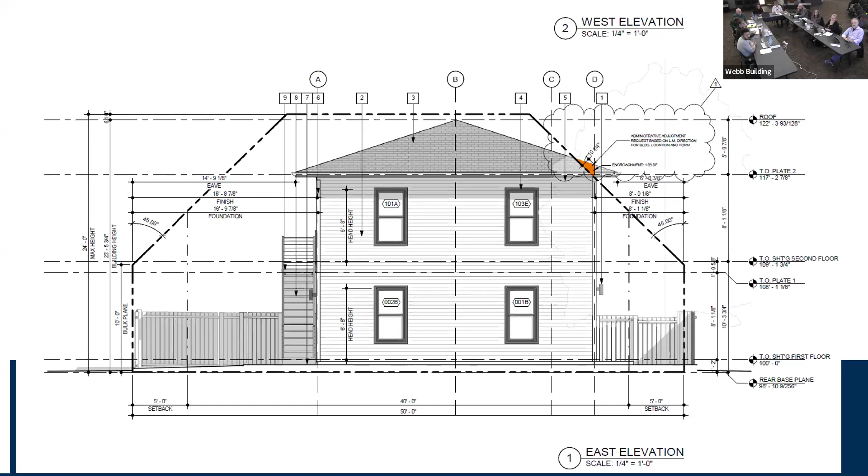So staff are supportive of that administrative adjustment request as the project has been placed on the lot to be closer to the north side of the property line, which is where it's creating that encroachment, to be placed totally behind the primary structure. As you can see here in the site plan, there is an exterior stair on the south side that does stick out a little bit, but the primary building massing is totally behind the primary structure.

So staff are recommending that the commission find this administrative adjustment appropriate, and per conversations with the city attorney's office and the zoning administration team, we have determined that this is the appropriate motion that the commission should be making on administrative adjustments. Therefore we have pulled this item off of consent just to clarify this motion and use this verbiage here.

Okay, commissioners, any questions for staff? Larry asked about when we use this language, whether it happens prior to the motion to approve the actual design. For any administrative adjustments we have in the future, we'll be using very similar language to what's on the screen. We will also clearly state for the future when you do not find the administrative adjustment appropriate, for clarification for zoning. So there will be some slight changes to the motions you see in the future when an applicant is requesting administrative adjustments.

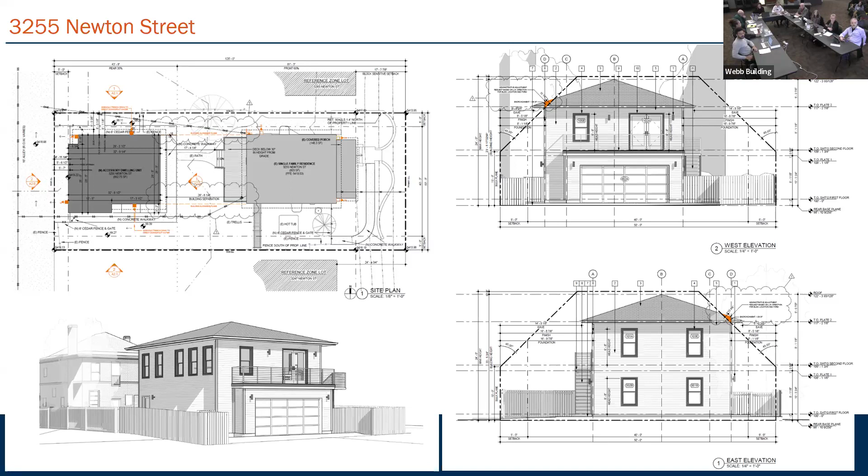Yeah, I think Brittany pretty much summed it up. It's just such a small part of the roof structure that's actually encroaching. Some people even think that's just the eave, but it's exactly where Landmark has asked for it to be, and we've gone through so many reviews, that's why we made that decision. It seems to be such a small encroachment that hopefully with you guys' help we can push forward.

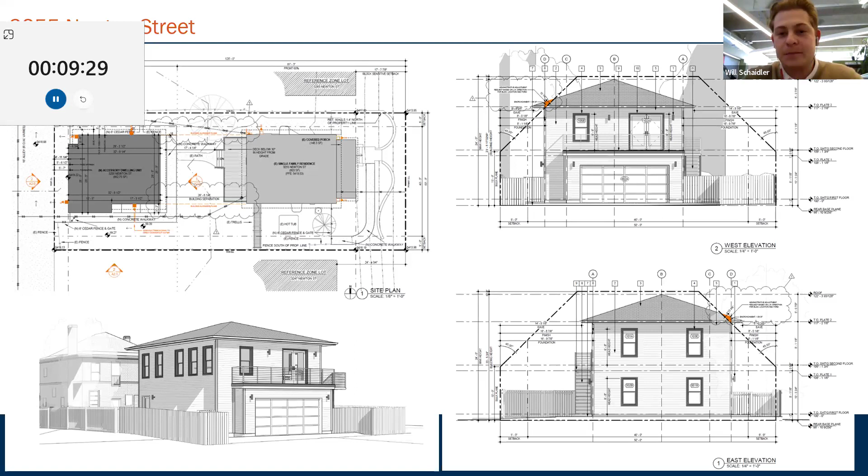Okay, well, thank you. Commissioners, do you have any questions for the applicant? Okay, well, there aren't any questions.

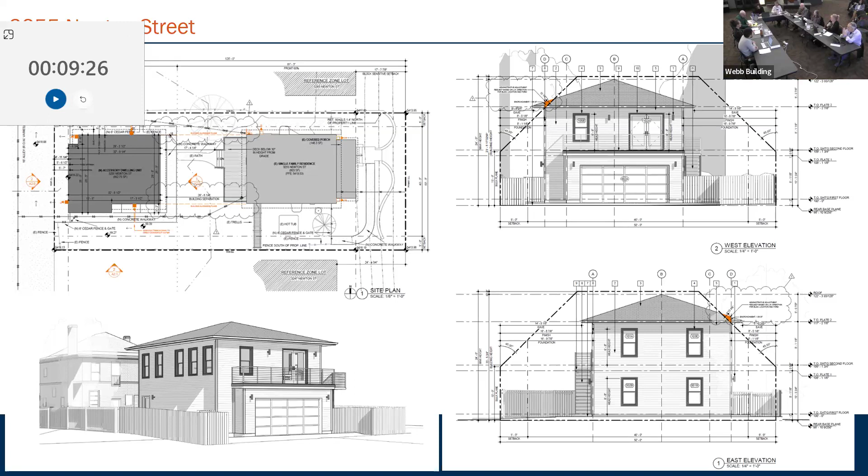Can we move back to the motion? Can we move back to the slide? Absolutely. Okay, I will give this a try.

Thanks, Erica. I move that the Landmark Preservation Commission hereby find, per Denver zoning code section 12.4.5.b, for application number 2023 COA-401 at 3225 Newton Street, that conforming with the zoning standards for height and bulk plane would have an adverse impact upon the historic character of the Packards Hill Historic District.

Thank you, Erica. Do I hear a second? Second. All in favor, aye? Aye. Pause, please. So I need a friendly amendment for the address to be 3255 Newton Street.

That's my apologies for a typo. Do I hear a friendly amendment? I'll make a friendly amendment to change the address to 3255 Newton Street. Thank you, Erica. Do you accept the friendly amendment?

Now do I hear a second? I seconded it. Gary seconded it. Did you accept the friendly amendment? Okay, all right. All in favor, aye? Aye. Any opposed, nay? All right, it has passed. So we are on, thank you so much.

No worries, it's okay, sorry about that, everybody.

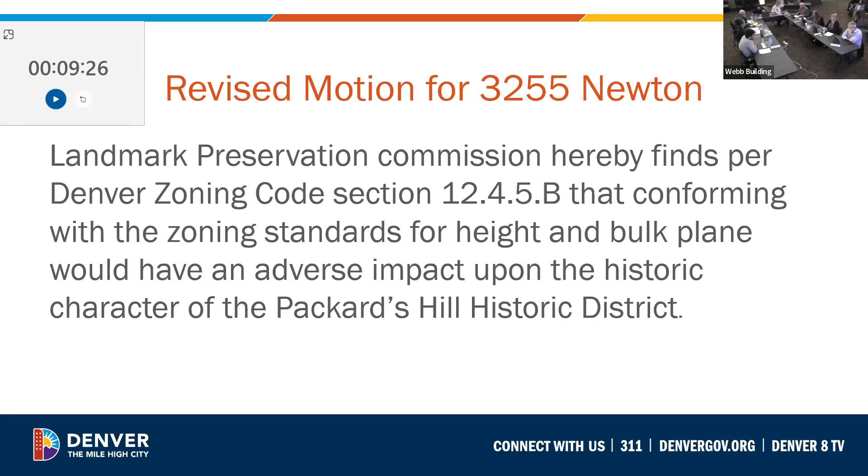All right, so let's get on to our next design review project, which is 2023 COA 518 at 590 Downing Street in the Alamo Placita District, and Brittany Bryant is our staff person.

So our second project of the day is for alterations and addition to the Esquire Theater, which is in the Alamo Placita Historic District. This building is considered non-contributing per the designating ordinance for the Alamo Placita Historic District. However, it was intentionally included into the district boundary when the district was designated.

So here on the screen, you can see the front facade, which fronts onto Downing Street. This is a corner property at the corner of Downing and 6th Avenue. It is in Alamo Placita, but across the alley is the Driving Park Historic District, and across East 7th Avenue is the East 7th Avenue Historic District. So you can see that this property is firmly surrounded by historic districts.

So the project proposal before you today is for an addition onto the south elevation of the existing structure. To the south is an existing parking lot, which is part of this parcel. There are minor improvements proposed for the existing parking lot, including some restriping, some sidewalks, and a trash enclosure. But this is all a new addition that you're seeing here on the south elevation.

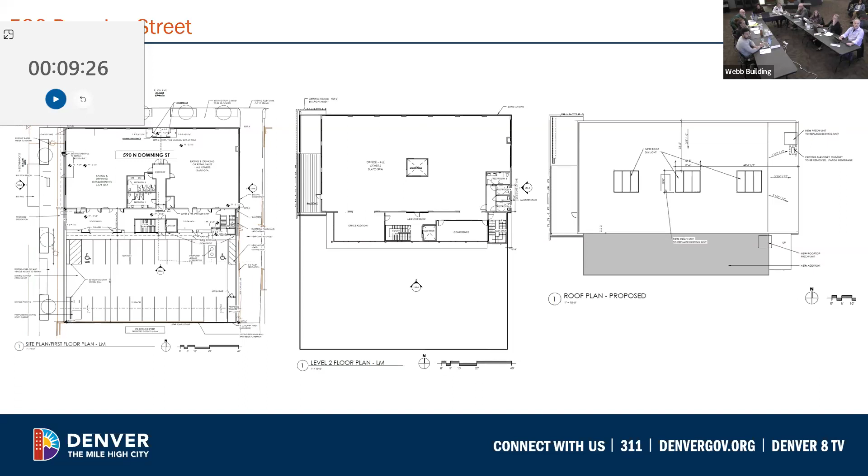In 1965, it was significantly altered by Denver architect Richard Crowther. Richard Crowther is known for his passive solar design architecture, his work at Lakeside, which includes signage, and his theater architecture in Denver. He worked on a number of theaters in Denver for Cinerama, principally the Cooper Theater, which is where the Barnes and Noble on Colorado Boulevard is now.

He did a pretty innovative theater design, round theaters with raised seats and minimal architectural elaboration on the exterior. The Esquire Theater does exhibit some of Crowther's architectural aesthetics, principally with the signage and the building materials used in the renovations that occurred to the Hiawatha Theater, which was primarily a brick building. There is a picture of the Hiawatha Theater in your application packet if you want to look at it.

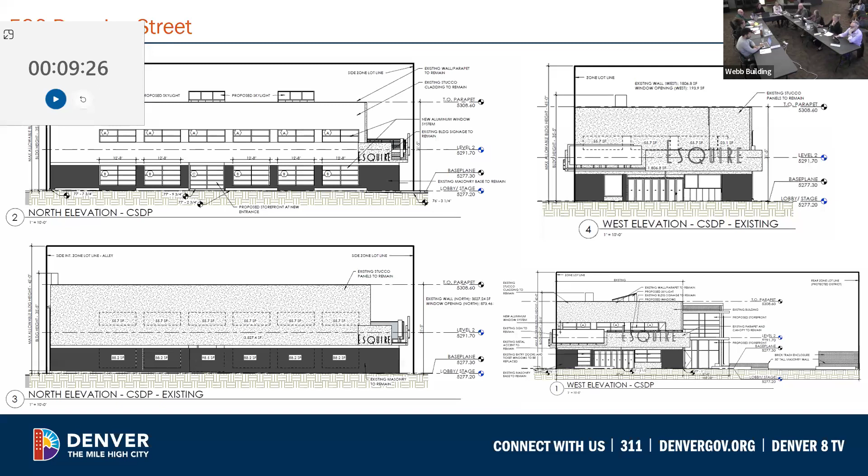But these alterations were from 1965, so they do post-date the period of significance for the Alamo Placita Historic District. Still, Richard Crowther is a well-known Denver architect.

The proposed alterations to the building include new openings along the north elevation, which is the 6th Avenue elevation, and the applicant is proposing to introduce new window openings on this elevation to activate the interior space. There is a historic sign on this elevation that will be retained as part of this project.

Staff has worked significantly with the applicant to propose openings that respect the architecture of Richard Crowther and retain the existing building materials. On the ground floor you have vertical ribbon fluted masonry, and on the second floor it's stucco, and those materials will be retained. They will be repainted as part of this project, but they are already painted.

On the Downing Street elevation, the changes to the ground floor are very minimal. The existing storefront will be replaced, and the existing windows on the ground floor will also be replaced, but there will be no changes to the opening proportions there. Those ground floor materials will be retained, as well as the existing signage and marquee signage.

The existing signage will serve as a balcony screening for a new balcony proposed just behind the Esquire sign. New window openings will also be introduced on the second floor of the Downing Street elevation, as you can see in this proposed elevation here.

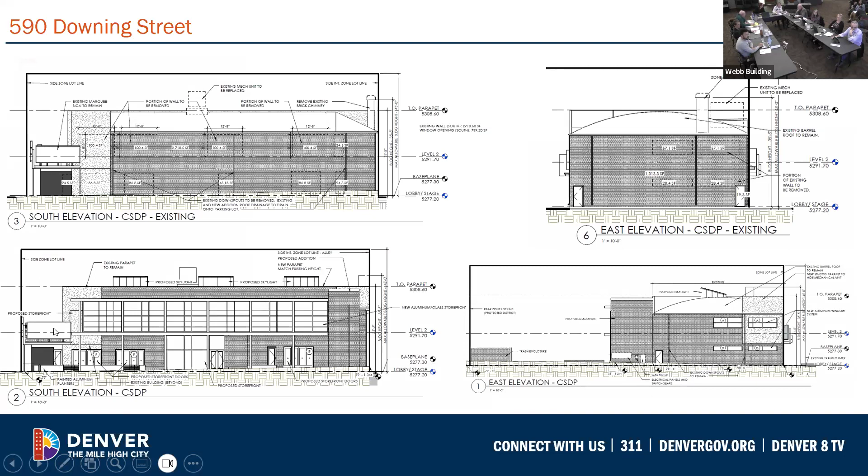And here is that guardrail detail that is located just behind the Esquire sign on Downing Street. It is concealed on the south elevation by an existing marquee sign, which you are seeing here. So this is a steel railing, but it will have very limited visibility from the public right of way. In terms of the new windows and storefronts, they are all anodized aluminum in a dark bronze color, and

then they are intended to have metal panels between the ribbon-like windows to kind of create a more ribbon window appearance versus a punch window appearance, based on researching Crowther's architectural aesthetic and how he used ribbon windows. And that is going to be a white color to kind of match the new stucco color that will be repainted there. So here are some renderings of the proposed alterations to the Esquire Theater.

Again, this is the 6th Avenue facade. You can see that recessed entry that is required by other city agencies to meet the finished floor when introducing a door onto this elevation. Those windows, which are generally considered punch windows, but have that appearance of a more ribbon-like window with that metal panel detail between the two. And then again, the applicant based that on the architecture of Crowther.

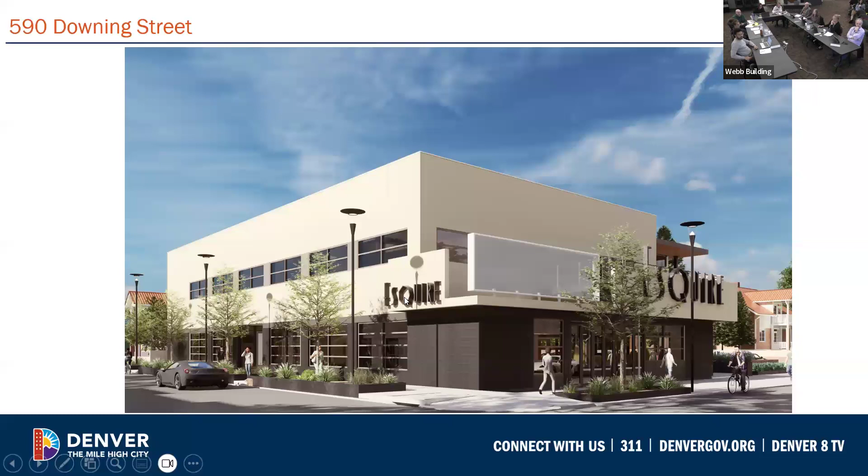New openings along 6th Avenue, and then new openings along the Downing Street elevation. There will be a balcony behind this Esquire sign, but the existing historic signage for Esquire and the marquee signs are to be preserved as part of this project.

Here is the view from the south elevation. You can see the stucco does turn the corner here. Currently this is the demarcation line where the building transitions back to brick. Historically it was constructed of brick, and it does appear to be red brick, but it's currently painted, so it's unclear to staff if this is to be cleaned. The new brick used in the site walls and for this stairway addition is intended to match that clean brick.

Generally, staff are supportive of these alterations proposed for the Esquire Theater. Although this is a non-contributing building, staff worked with the applicant significantly to respect the existing massing. The addition was initially proposed to wrap the corner on the south elevation and onto the Downing Street facade, and staff worked with the applicant to preserve as much of the historic marquee signs as possible. The applicant always intended to preserve the Esquire signs, but it was important to us that this marquee sign here stay, and this marquee sign here as well.

We also looked very carefully at the new openings proposed for the building, making sure they don't negatively impact the surrounding historic context, while also respecting the architecture of this building, which is a little later than most buildings within the Alamo Placita Historic District. Those are primarily residential and don't come up to mid-century modern in terms of what's considered contributing. We also respected the small-scale commercial seen along 6th Avenue, in Alamo Placita, East 7th Avenue, and the Driving Park Historic District.

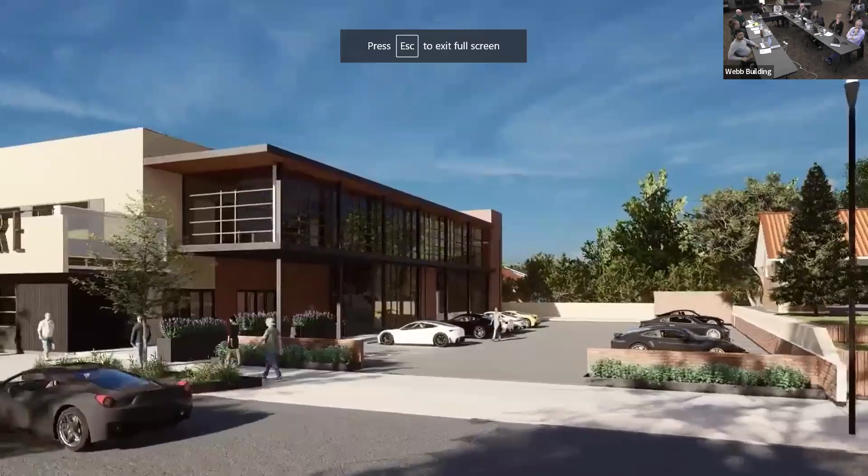I do have a 3-dimensional model for this, which was posted to the website. I'll play this quickly because I think it helps with understanding how the addition correlates with the existing structure. Here you can really see that the addition is not touching the existing building on the ground floor, preserving the existing materials, principally the vertically fluted masonry on the ground floor and the stucco on the 2nd floor.

Following the staff report, I received a letter of support for this project and forwarded that to the commission. I also received a letter of support from the Alamo Placita Registered Neighborhood Organization on this project. Unfortunately, I received that at 6 p.m. yesterday evening, and per our public comment period policy, I'm not allowed to forward that to the commission, but I want to make the commission aware that we did receive that letter from the Alamo Placita neighborhood in support of this project.

Commissioners, any questions for staff? Doesn't look like it. All right, is our applicant here in person?

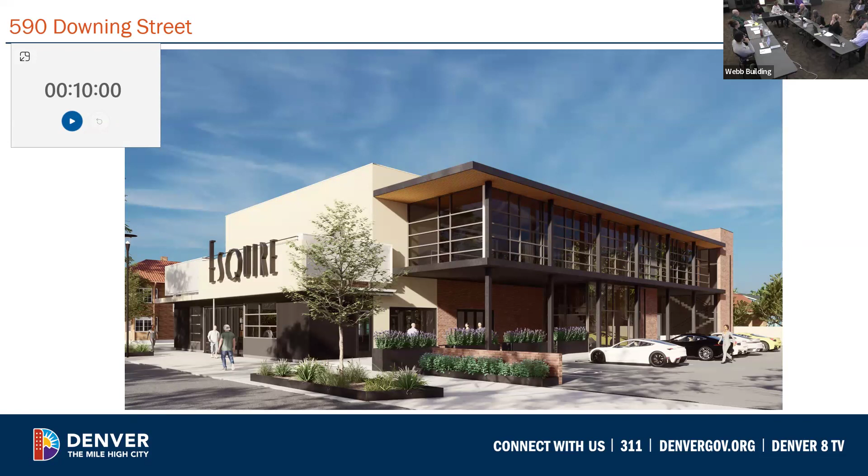As we're waiting, we've been working with Jennifer and Brittany, and the process, in my mind, has been going very well, with Jennifer being the adaptive reuse facilitator, or project coordinator for the city of Denver. Oh, that's right, that's a new position.

Yeah, we've enjoyed that process with the Esquire buildings. So Jenny Buddenborg used to be that person, oh, she left us. She left us again. But Jennifer, how many times does Jenny get to leave us before we just tell her no?

Their apologies. Yeah, it's gremlins. It's clearly the only explanation.

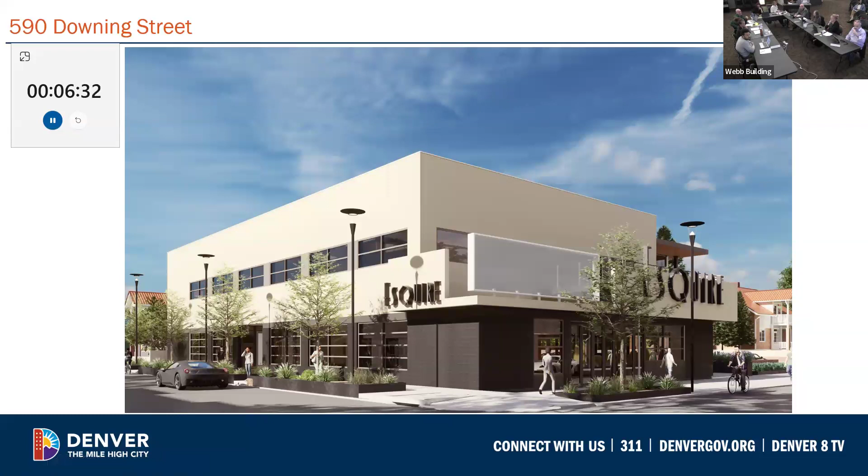So you could see how on the first floor, there's a lot more windows, again, to increase the vibrancy along that stretch of road. So by introducing the planters and the new windows and recessing the entrance because of storm water management criteria, that's how the design came about.

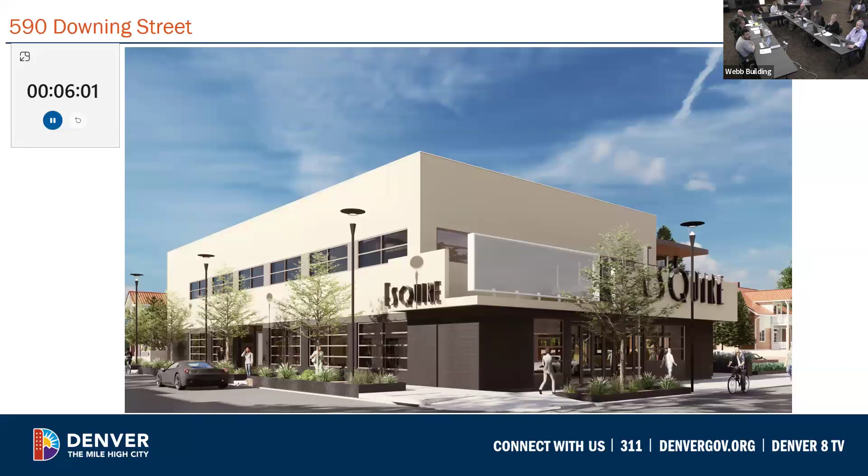And then on the upper third, we wanted to really maintain that stucco cap and introduce a ribbon window system, kind of very similar to modern architecture and some of Richard's original residential works. Now to get back to the concerns that Brittany had, if we'll go back to the other rendering, the existing brick is painted right now.

So you can see the red brick that we're proposing looks like exposed brick. We intend to sandblast and see what the condition of that brick is. We want to bring back the historic brick on the south and east side, and then match any new site walls, the stair corridor and elevator corridor with a similar brick color if we can get the paint off without destroying the existing brick. Sometimes when you sandblast old brick, it falls apart, so if that happens, we'll paint over the existing brick.

In terms of the lighting we're proposing, we're on the 6th Avenue property line, so we can't introduce much, but what we're proposing is a very minimalistic approach. On 6th Avenue, where we recess that entrance, we'll have a couple recessed cans to make the entrance glow. With the new storefront windows, the space will glow during occupancy hours. On the south facade, we intend to have recessed cans, both in the upper and lower soffits, to light the outdoor areas.

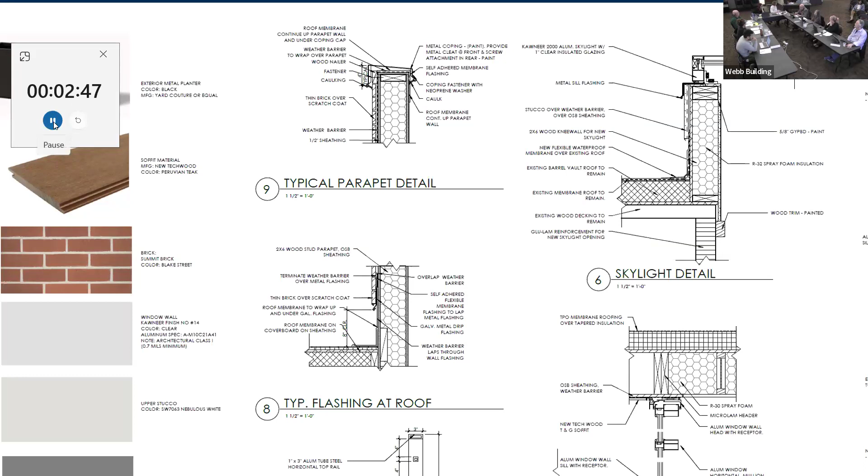Commissioners, do you have any questions for our applicants? Larry: Yeah, that parapet that you're proposing the thin brick for, it looks like on section 5 on LM-8, that's maybe 3 or 4 feet tall, is that correct? Probably 4 to 5 feet tall above the existing, because the barrel vault sits on the masonry wall on that south side. Got it. And the existing structure that would attach to is wood framed above the barrel vault level?

Barrel vault is probably wood frame. The barrel vault we suspect is potentially a steel vault with structure above it, so we'd probably sit this wood parapet on top of it. We didn't want to introduce brick on top of an existing bowstring truss. I see, so the new parapet wall structure is new on top of... Yes. And it really is only there to continue the existing stucco parapet that wraps around the front of the building. Yeah.

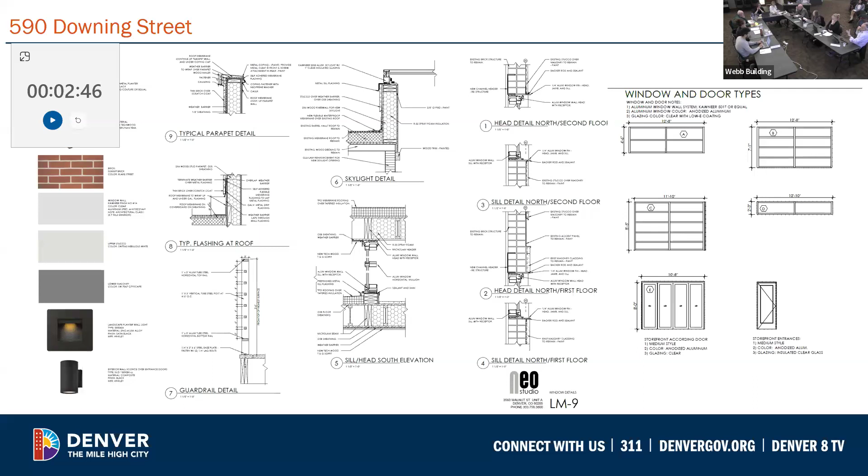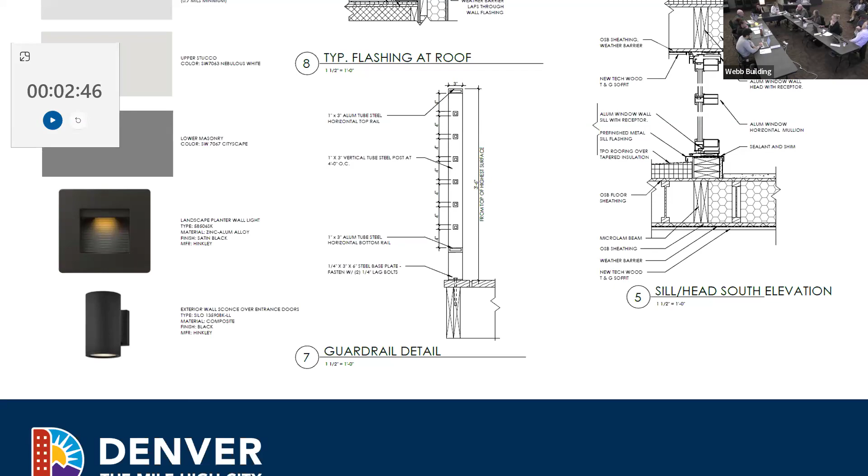The guardrail on the balcony that faces west, behind the Esquire sign, was any thought given to making that glass in lieu of metal? The reason I ask is because I generally agree with staff that it's not in conflict with the sign, given how far it sits back from the sign and how we're lower than it is at street level. But the renderings sort of say the opposite, and show me that it does conflict a little bit. I think it would bother, take away from that sign and its importance from the street.

And then just a friendly comment — it might also, from the interior of the building as you're experiencing it, you want to feel that sign. I think it's a benefit to the occupant within, so glass would avoid that. So that's a friendly comment. The second one — the first one is a comment related to the guidelines as they apply to preserving that sign.

I think it's a great idea, so we could definitely incorporate that into the final design, from both aspects. And the question is, does it have a metal cap or is it just glass to 42 inches? That's completely up to you, my preference, but it's subjective—I'd prefer it be entirely glass and cantilever supported. But I could be convinced otherwise by my peers.

Any other questions? You can have a seat. Okay, thank you very much.

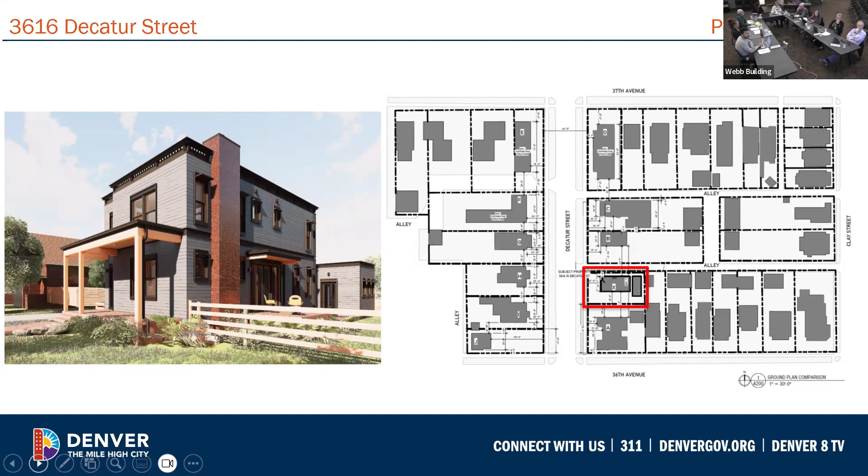On the right-hand side of the screen, outlined by the red box, is the proposed site. On the left is a proposed rendering of the building.

These are the proposed elevations. You can look at those in your application materials if you'd like, and I'm going to zoom in on specific parts of the building.

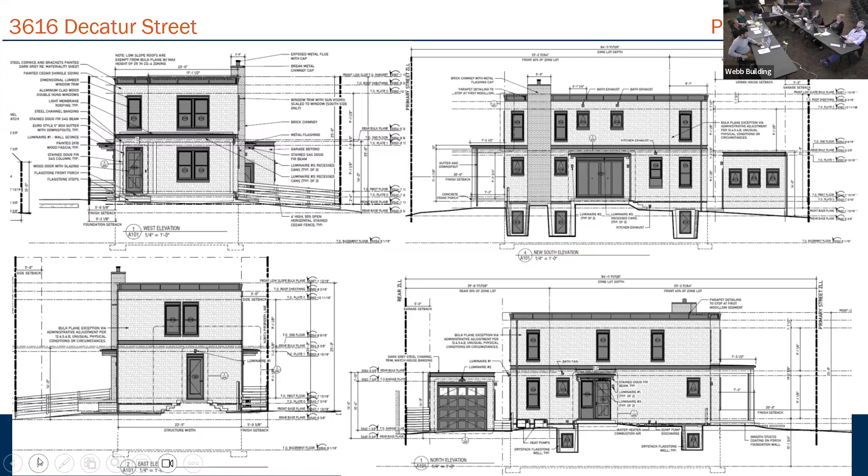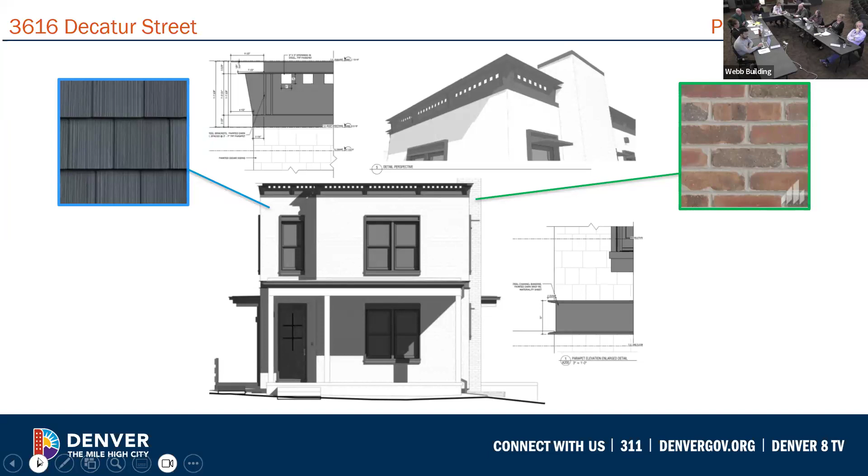The front entry door and north entry doors will be TruStile wood half-light doors. They will have a divided light pattern, and that is supposed to be a true divided light grill or muntin on that door.

The south patio doors will be Sierra Pacific aluminum clad full light bi-parting sliding doors. In the past, the commission has not allowed the use of sliding door operations, as they do not show up in the historic context. Staff is encouraging that they select a door operation that better fits that context, especially since this will be on a side elevation, but there will be quite a bit of buffer space between this and the house next door, with visibility from public vantage points. So staff is encouraging the use of swing or bifold doors here rather than sliding doors, citing guideline 4.8 specifically for that reason.

The applicant is also proposing Sierra Pacific aluminum clad full light doors for the back doors. The windows will be Sierra Pacific aluminum clad wood windows with double hung, awning, and casement operation types.

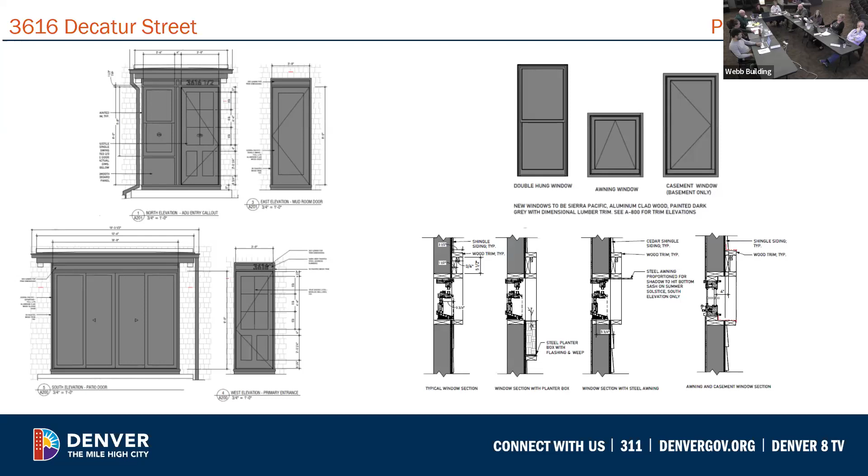Finally, all the windows will be inset into the wall, our required minimum of 2 inches—I believe it's actually more, I think it's 3 inches—and that should show up in those section details provided on the lower right-hand side of the screen.

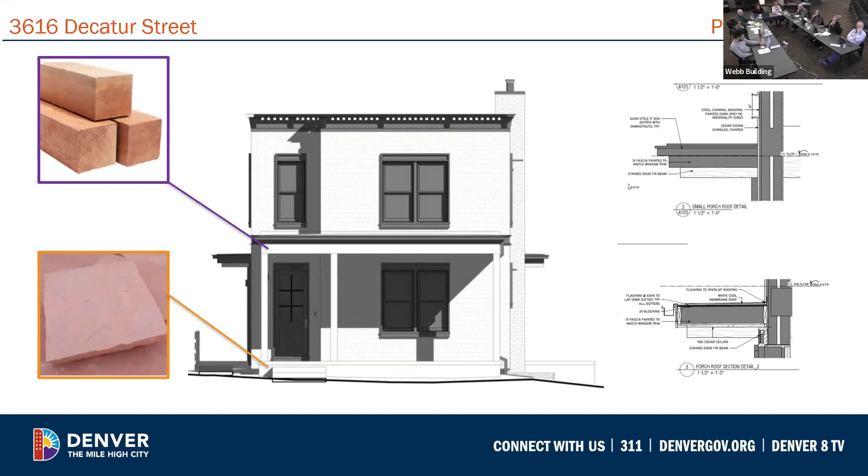So the dwelling's entry porch will have a flat roof clad in TPO membrane roofing. The porch soffit will be painted steel with a 6x6 Douglas fir beam as indicated by the purple box, and the porch roof itself will be supported by square 6x6 Douglas fir posts. The porch floor will be clad in red flagstone as indicated by the orange box. On the right side of the slide, you'll see section details of the proposed porches and canopies that will be on the sides in front of this building.

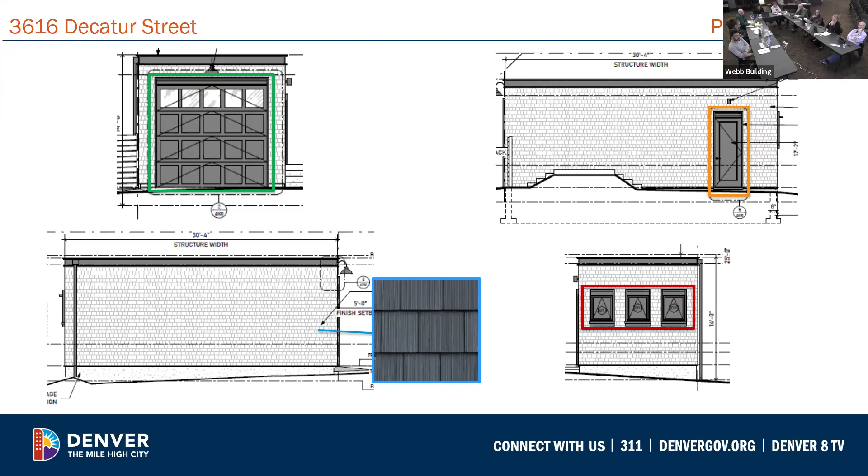The garage overhead door will be a Thermacore steel panel door with lights, indicated by the green box. The service door will be a Sierra Pacific aluminum clad wood full light door, outlined by the orange box. Finally, the Sierra Pacific aluminum clad wood windows will be inset 2 inches, as indicated by the red box on the screen.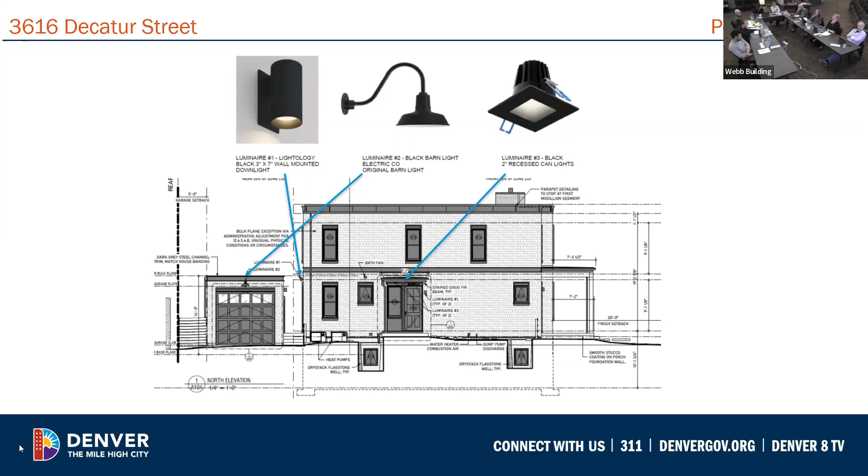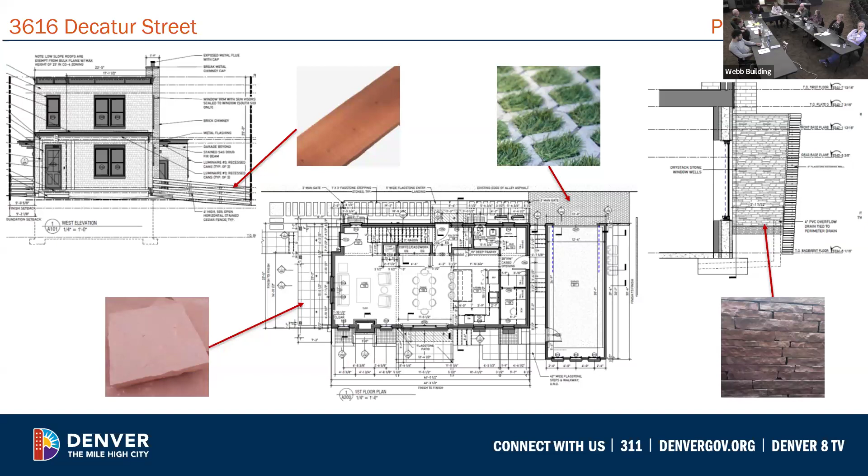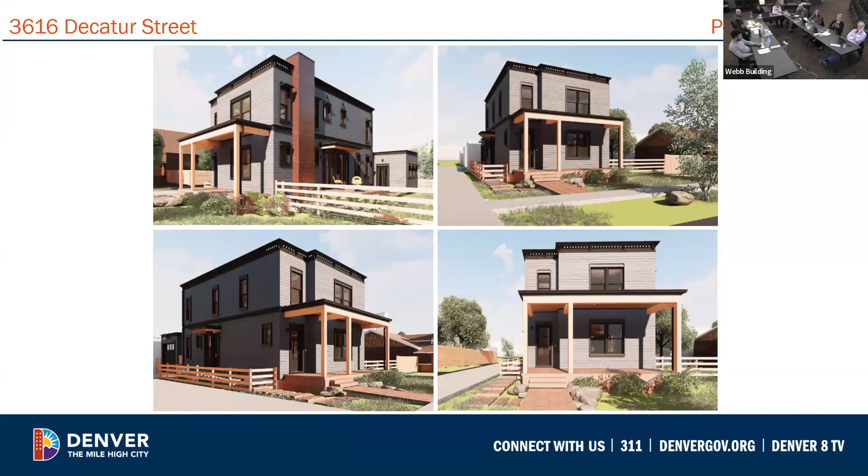Finally, here are some renderings of the proposed infill structure. Landmark is again recommending conditional approval of this application, with the conditions that the applicant select a non-tumbled edge standard brick veneer for the chimney, and that the south sliding doors be either swinging doors or bifold doors. We're citing guidelines 4.7 and 4.8, character defining features for Potter Highlands Historic District, presented testimony and submitted documentation.

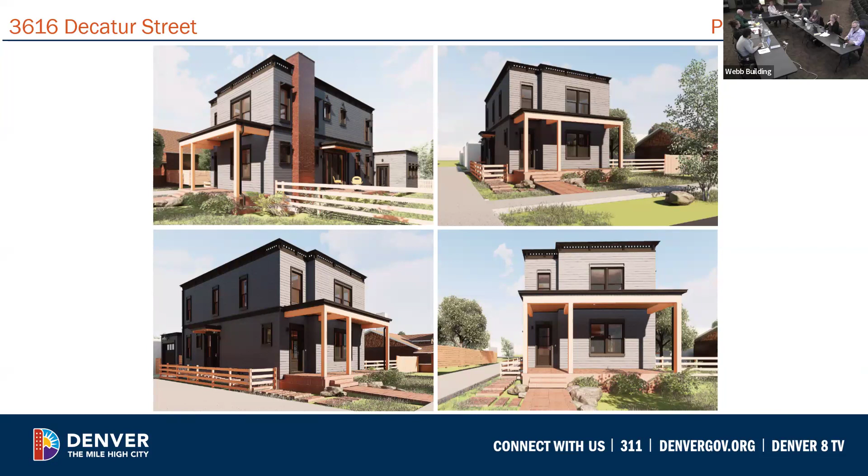There's no one here to give a public comment in person. Do we have anybody joining us virtually that would like to make a comment? I don't see any hands raised. All right, Jesse, did you have any other comments? Okay, great. All right, commissioners, then let us go into deliberation.

What are your thoughts? I think this is a great project, and I agree with staff's assessment and those two simple conditions, and I support that. Yeah, it sounds like they're amenable.

Any other comments? I have a friendly comment to the applicant that is not exactly our purview, but if your client is looking at low carbon construction on the south side, I would look at shade trees that would shade the structure in the summer to lessen the need for air conditioning.

There's a giant tree on the south of that building that's already there. That's great. But they might want to consider it may not survive construction. Well, it's actually in the neighboring property. So if they're looking at low carbon, there are other landscape solutions. And this is why we have a landscape person on our commission.

Thanks, Erin. Otherwise, I agree with Erica that this is an excellent application. And I'm excited that someone wanted to do low carbon, sustainable construction in this day and age.

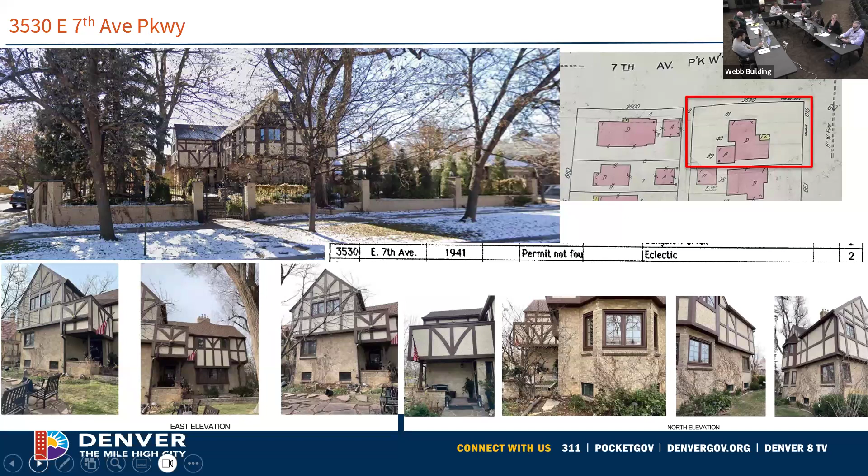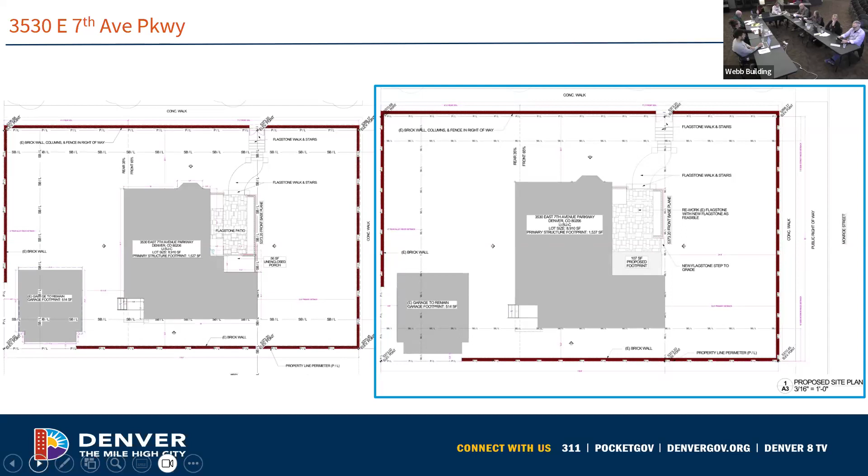I realized this morning that I did not finish my staff summary and my staff report, so I apologize for that. However, the applicant's very detailed letter in the application details the issues with the existing balcony area and main entrance.

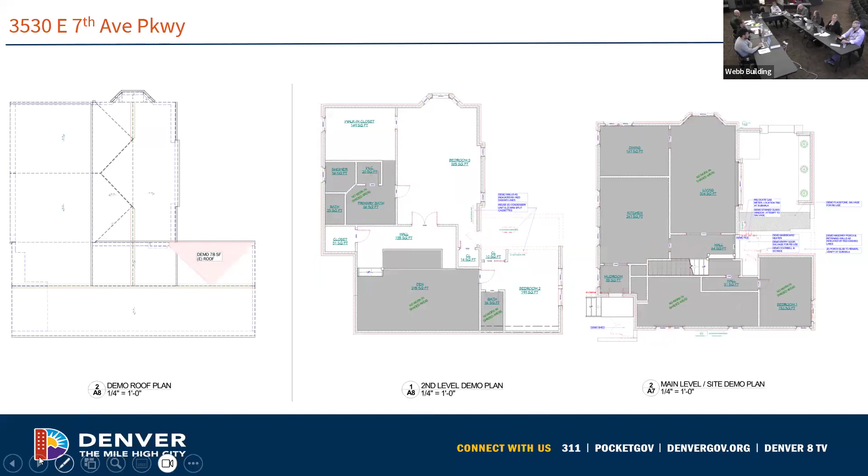Additionally, a majority of the primary building entrances on East 7th Avenue Parkway are oriented to the parkway and not the side streets on corner lots like this one. So it does appear to follow design guideline 4.2.

The new 2-story addition features typical features found on the existing structure and mimics the existing Tudor style of the 2nd floor. The new addition reorients the existing entry and porch towards the parkway instead of the side street. Scaling elements like the half timbering and window bay match what currently exists on the structure, meeting design guideline 4.3.

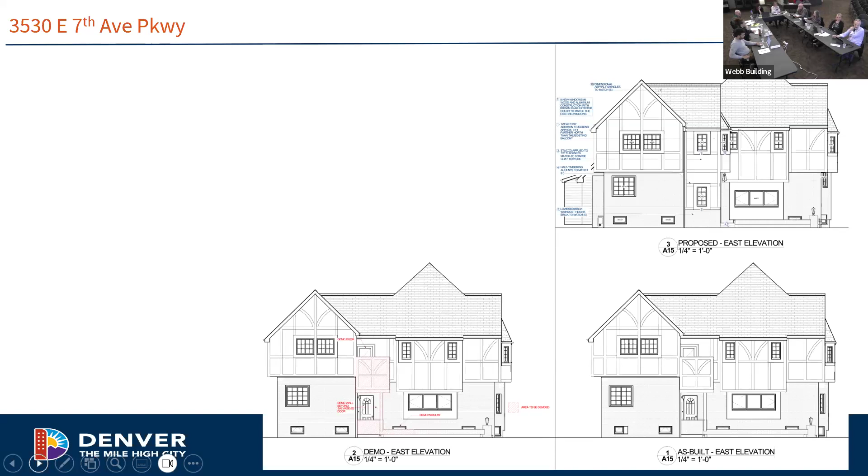Here you can see the proposed changes to the north elevation, looking at the structure from East 7th Avenue Parkway. At the bottom left is the proposed demolition, again, of that existing balcony area and some of the front porch elements. Design guideline 4.4 states to design the height, mass, and form of a new building to be compatible with the historic context.

The height, mass, and scale of the new addition matches and blends in with the existing structure, but does make minor changes to differentiate it from the original structure, like insetting this addition from the existing structure, adding a half-circle transom window above the new primary entrance, lowering the brick height at the first floor, and slightly varying the timbering on the new addition.

Design guideline 4.5 states to design a new building to be recognized as current construction while respecting key features of the historic district and surrounding context block. The new addition matches the existing structure's eclectic Tudor style, does not detract from the character of the existing structure or the district, and blends in, though will be minimally changed to differentiate the addition from the existing structure.

Design guideline 4.6 says to use a roof form that is compatible with the context. The roof form here will match and blend in with the existing structure in terms of pitch, orientation, and complexity.

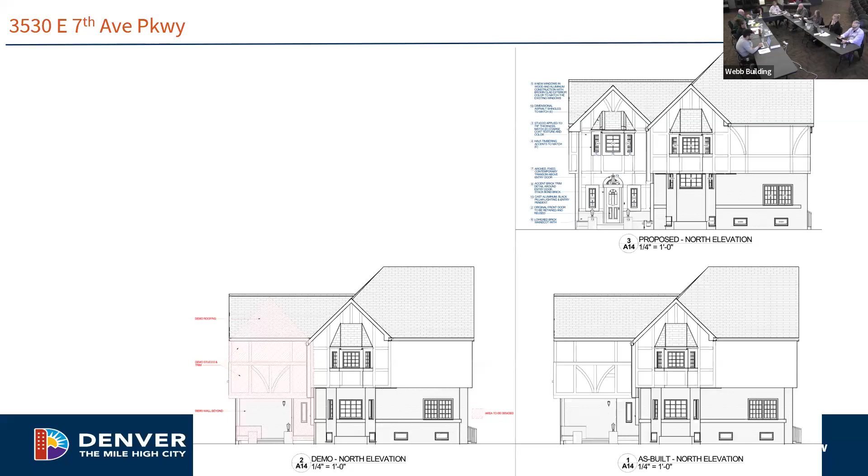Design guideline 4.7 states to use materials that appear similar in scale, color, texture, finish to those seen historically in the district. The structure uses minimal brick at the first floor with a brown color that will be slightly different from the existing brick color at the first floor. The addition will then match the existing stucco and wood half timbering at the second floor. Stucco will be at least 7/8 inch thick and will match the existing second floor finish, and the half timbering will also be wood to match the existing.

Design guideline 4.8 states to design windows, doors, and other features to be compatible with the existing context and structures. All the new windows will be aluminum clad wood, casement and fixed windows to match the style on the existing house. Staff did notice a discrepancy on sheet A11: it has window WO number 4 called out as both a casement and a left sliding window. Staff mentioned that needs to be corrected in the final plans to a casement window, and staff has added a condition for that.

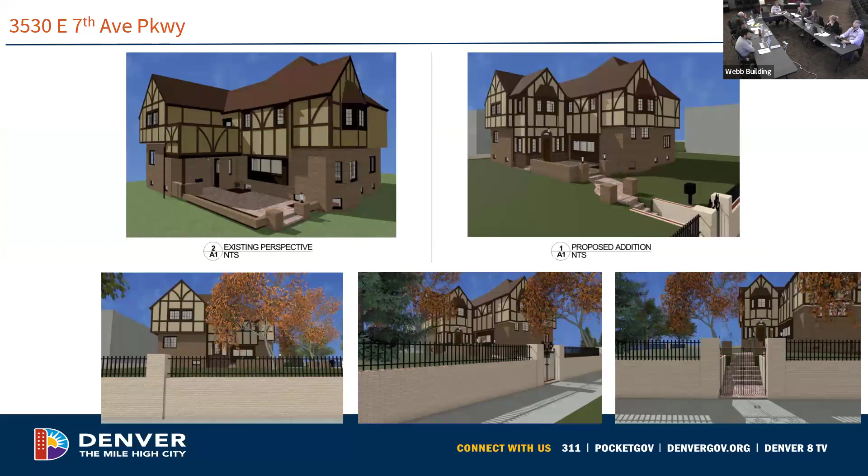Finally, here are some isometrics showing the existing proposed configuration on the left at the top, and then the new configuration of the two-story addition on the right at the top. Below are isometrics of how the addition would look from different angles.

The existing primary structure has been heavily altered by adding that second floor in 1980 without permits, after the period of significance for the district. This proposed new two-story addition does meet design guidelines for non-contributing structures, 4.2 through 4.8.

Therefore, staff is recommending approval with the following conditions: one, that the applicant add dimensions to the plans and elevations for the addition; and two, correct window WO-4, the left sliding window, and change that to a casement or a fixed window on page A11 of the application packet.

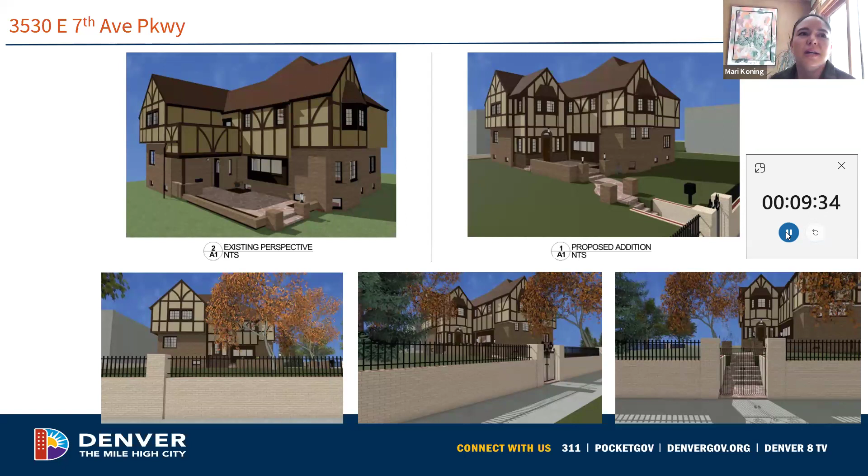I'm here with Chantal Peretz on Zoom. She is Manager of Design and Development, and we've been with the homeowners, Ellen Canfield and Marty Koyle, from the beginning since December 2022. This is an important project to them and also to us at Classic Homeworks. So thank you for giving us the time.

Thank you, Crystal, for presenting that so thoroughly and guiding us through this process. You've made it a good learning experience. Do you have our presentation or PDF? Oh sorry, yes, give us that.

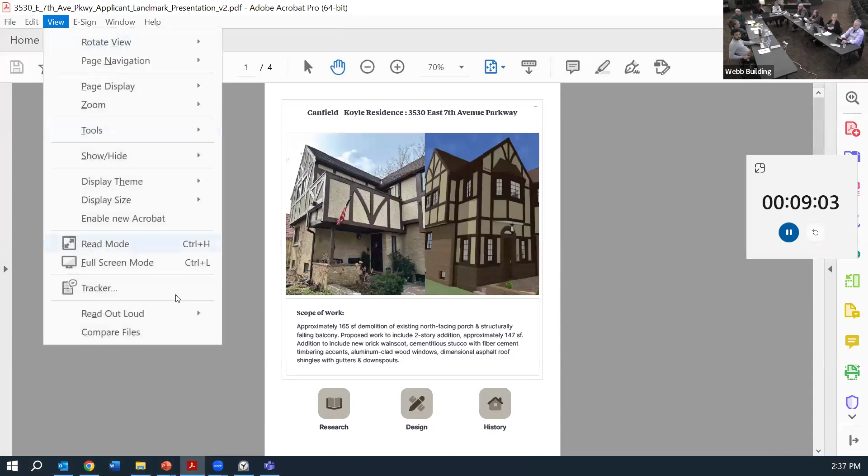Crystal hit on everything pretty well, so I'll reiterate some bits. You understand the scope of work - it's a pretty modest two-story addition, about 147 square feet. I want to walk you through our process; we always start with research here. Can you go to the next slide?

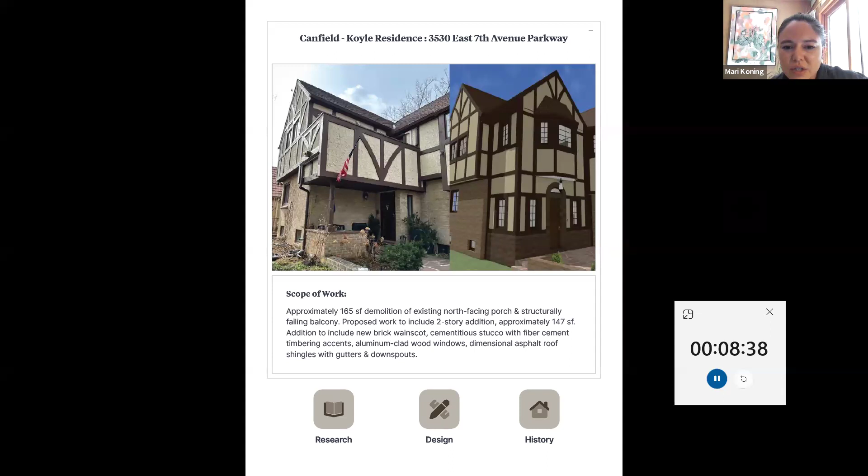As Crystal mentioned, the home was built in 1941, and we found via Sanborn maps and library research that it was single-story brick and outside Landmark's period of historical significance, defined as on or before 1943. That key piece of information helped guide us with the design moving forward.

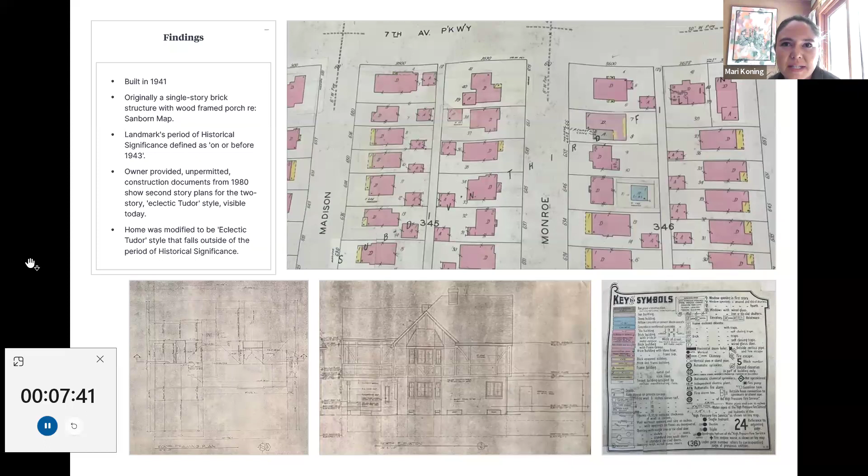Following our technical research, moving to the next slide, we took to heart the owners' desire to enhance the home and the greater parkway, while maintaining a traditional approach to an addition. It's fairly modest in size and footprint, but our central design goals were to create usable square footage.

At the entry and the second level above, in place of that structurally unsound balcony that was in a pinch point of the roofs, with water damage and debris collection - so we're bettering the space for the homeowner.

Our goal was to differentiate yet maintain a kind of architectural language here with the eclectic Tudor style of the home.

Some departure elements from the original home included the entry door orientation from the north and the inset at the east, about 9 inches offset from the existing home, and that lowered brick wainscot element that Crystal mentioned, a darker brick variation.

We're not proposing to match the exact blonde brick the home currently has, but a darker color, and wrapping a soldier course of bricking around the entry door with a fixed, modern arch transom above the entry.

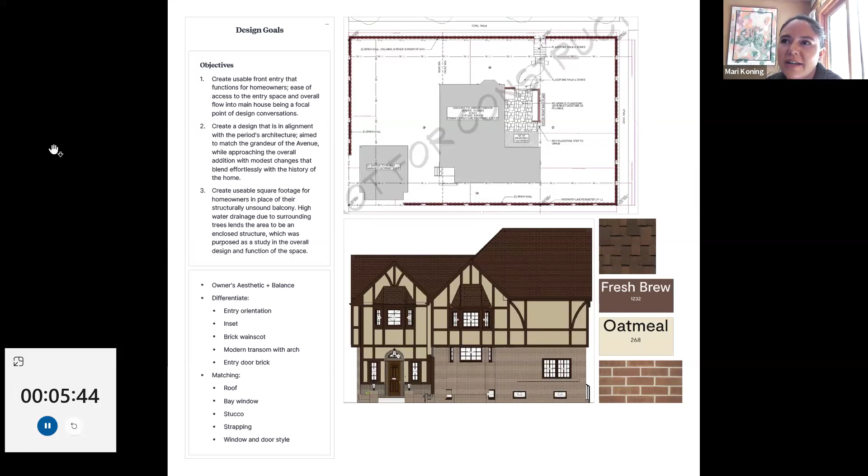I want to circle back to the final slide here on the history, how we came to know what we know today. We've been really lucky to have enough information, abundant access to the home's history from our clients moving into the home - it was a very unfinished kind of situation.

It hit on the point that it was an unpermitted project, and there were a lot of loose ends. Hearing from neighbors also revealed that it was unpermitted, and the valuable plans the previous owners provided to our owners really helped us work through this process.

I think all of this is to say we've done the legwork and we believe our design aligns with our owners' needs, the East 7th Avenue neighborhood aesthetic, and we're also satisfying Landmarks guidelines.

One last thing, I want to briefly mention that we accept the design recommendations and conditions put forth by Committee 1, and will gladly clarify the dimensions on the plans and update window W04 to a casement style.

So thank you for pointing that out. And then really, just thank you on behalf of our team and the owners. They've been there for 3 decades and this is exciting. So thank you for your time. And I think the first question was about those windows at the front, and that is a good catch on you. We are not touching those windows. They should be at a lower elevation. That was a program error, I will say.

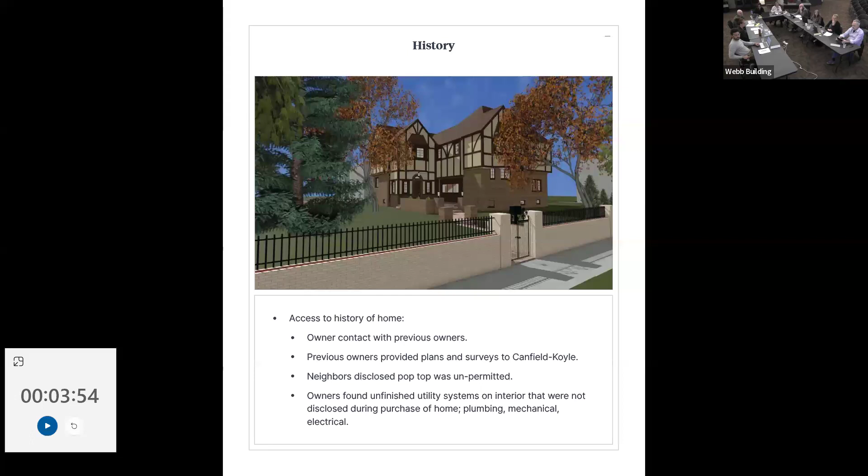Chantal, did you want to make any comments? Not to make any comments in our presentation here, but I'm here to help answer any questions the committee has for us. Great, okay, terrific. Thank you very much. Commissioners, do you have any questions for the applicants?

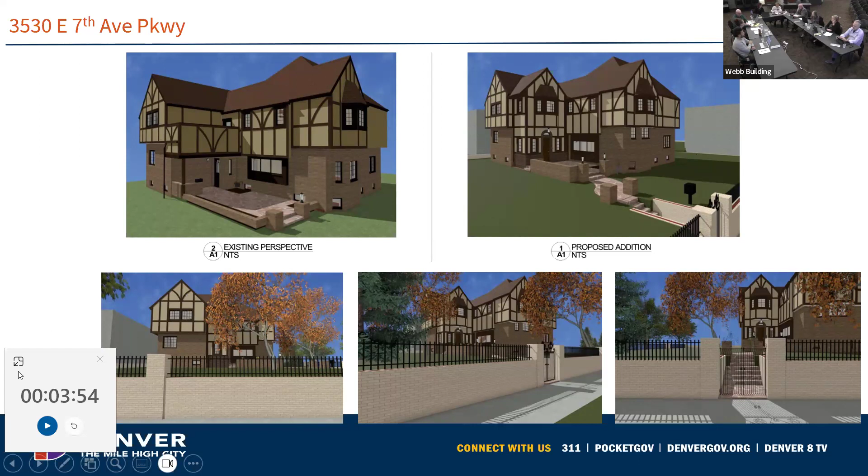Did they answer? Yeah, thank you for answering my question. I appreciate it. Any other questions? Okay, great, no questions here. So thank you very much.

And now we'll go on to public comments. Is there anybody with their hand raised? Anybody joining us, emails? No. Okay, doesn't look like we have any comments from the public.

So were there any redirects or any comments? Okay, great. All right, commissioners, let's go into deliberation. The first thing we have to figure out, of course, is this contributing or not contributing.

I'm a little bit, I wonder how this large of an addition could have happened in this neighborhood with everybody watching without a permit. Yeah, I was. But that's beside the point. So I agree with staff's recommendation to consider the building non-contributing and also their recommendation to approve with conditions.